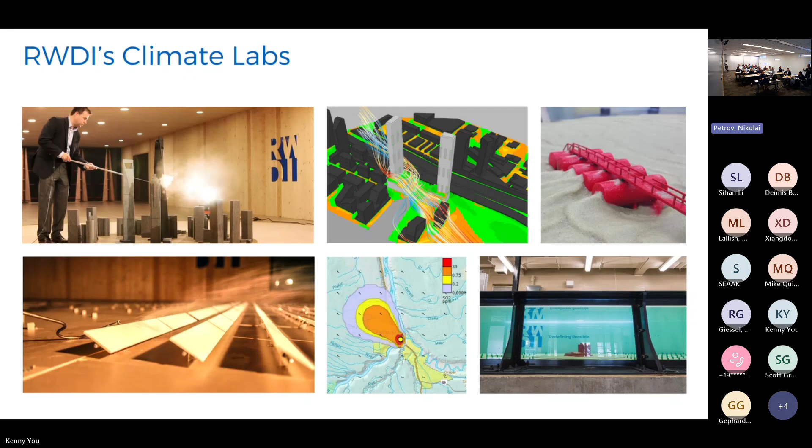Anyway, on the bottom right is our water flume. So just some cool tools. And then this slide, really hard to read for you all. I call this our Wheel of Fortune, but essentially it's all the different service areas that we offer. So we have a lot of wind and snow stuff. We also do a whole host of sustainability type work. So like energy modeling, green certifications, guiding principles type stuff, or even energy modeling and commissioning type work.

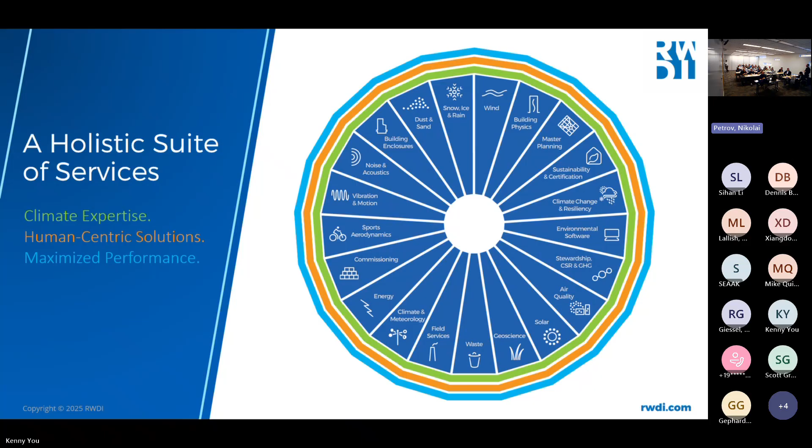We also have a full noise, acoustic, and vibration team. So building acoustics, vibrations from structural vibrations, also acoustic vibrations. And then we have a full enclosure consulting arm as well. So think the exterior of the building, all 6 sides of the box. How do you keep the building warm and dry? So that's what that team specializes in. So a whole host of different types of things, again, on how the natural climate affects our built environment. And I'm going to hand it over to Kenny to get you into the exciting stuff about snow.

Yeah, so today we've prepared 1 to 5 sections to talk about snow and ice. The first probably should be the most interesting to everyone sitting here. It's really how things have changed from ASCE 7-16 to ASCE 7-22, because we've seen some major updates on the snow loading provisions. They're basically trying to make a step forward to make more realistic predictions on both how the ground snow load distributes across the country, and also how the snow loading distribution will realistically form up on the roof pieces, right? And then it also tries to address the uniqueness of your local climate and also your roof thermal performance. I think I'm just going to dive right into this first section here.

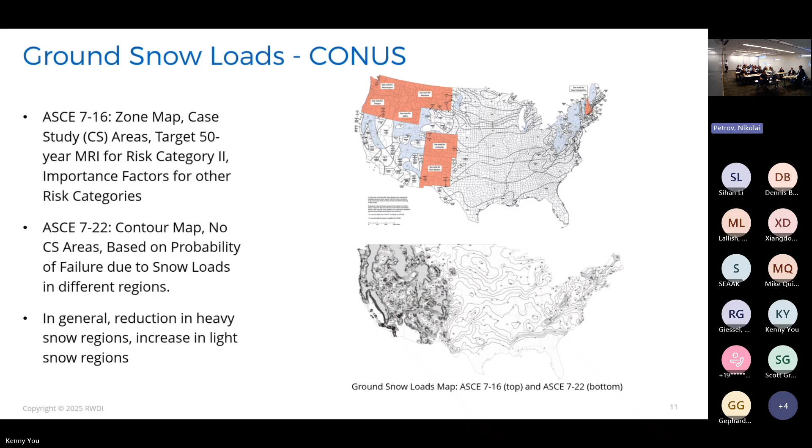So that is the case for the continental US, but not for Alaska. Unfortunately, or fortunately. So far in the 7-22 version of the code, what the code has done for Alaska is really just to bake the 1.6 factor into the values directly. So for example, for Anchorage, you had 50 PSF before for, I guess, a risk category 2. Now you're just having 80. That's a straight up multiplication of 1.6 there.

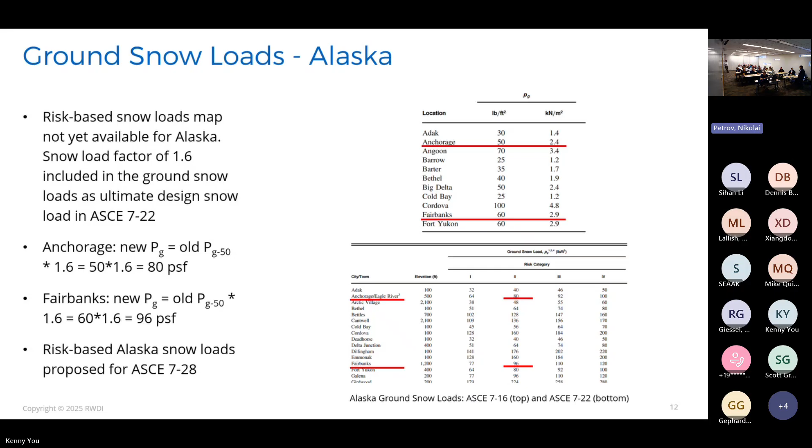But what I heard is that the risk-based approach for Alaska has been proposed, and I think successfully, so it should be coming up in the 28 version of the code. So I guess stay tuned for that.

And the other big thing that was brought into the 22 version of the code is what we call a winter wind effect. Previously we looked at how the ground snow load is distributed across the country, right? Now we are looking at how snow is actually going to accumulate and distribute on the building roof. Previously, if we were calculating the drift surcharge on what we call a step, or a wall between an upper and lower roof, it's purely a function of the fetch length of the upper roof with your PG, which is your ground snow load.

It doesn't really matter how windy it is in a specific city, but you can probably imagine that the windier you get, there's a better chance for wind to push the snow towards that step, essentially forming a larger surcharge, right? So that behavior has been addressed in the newer code, where a winter wind parameter W2 is now introduced, which means in the lower winter wind region, we've got a reduced snowdrift with a lower W2 value, and in the higher wind region, we've got a higher W2. That means the calculation for your drift height will be increased for those areas.

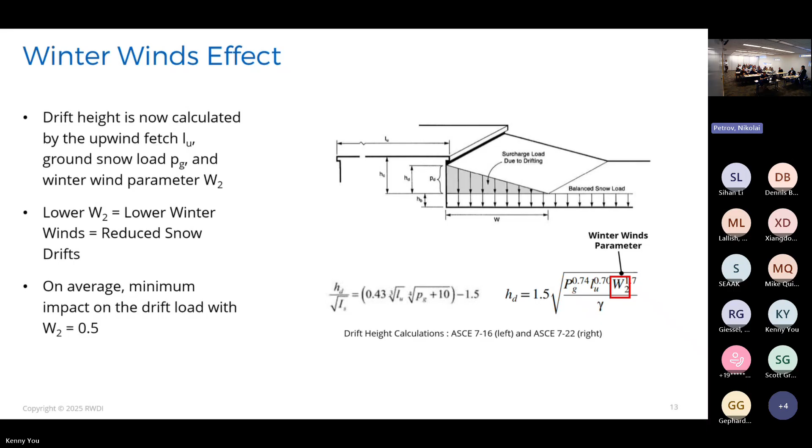And on average, if we're looking at W2 close to 0.5, that means basically very minimal change from the previous code. And if you're looking at Alaska specifically, one thing I noticed: I was looking at this winter wind parameter map for the continental US, and I think the W2 value ranges from something like 0.25 to as big as maybe 0.65. But in Alaska, we actually have a W2 all the way from the lower range of 0.1, which I think was in Fairbanks, all the way up to 0.8 or 0.9.

What that means is that we've got this really drastic difference across the state, where we have cities with really low winter wind speed, so not really able to push the snow on a flat roof towards the step region forming a big drift. But we also have regions where we get, I guess, crazy winter wind, and that's forming really large drifts.

I tried to do a quick calculation for some of the major cities here, and both for Anchorage and Fairbanks, we're looking at relatively low W2 values, where we actually would see a reduction in the drift height calculation. I was a little curious about that before I came here, because those values do mean a really low wind speed, and we were just in Fairbanks for 2 days before this. There's basically no wind at all. And here in Anchorage, I think it's a little windier than Fairbanks, but still, I would say it's relatively calm in terms of how intense the winter wind is. Yep.

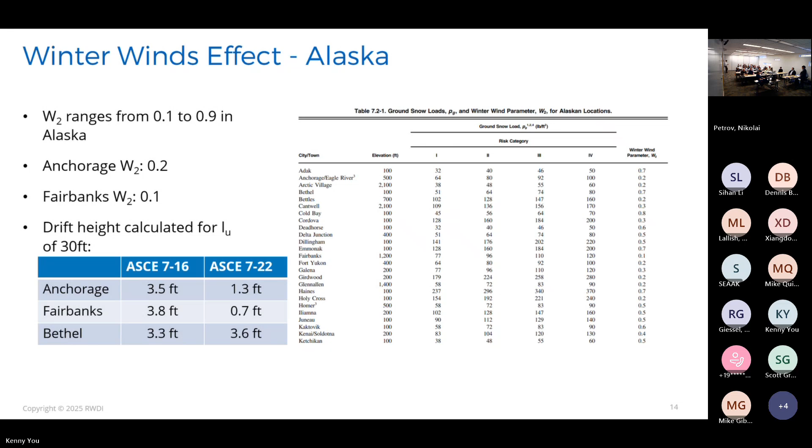I think the next change that was brought into the newer code was this calculation for windward drift. Because previously, if we are looking at a similar size upper and lower roof, we would almost always find the leeward drift would govern, just because your windward drift calculation is 0.75 of the leeward drift, and the geometry ratio stayed the same, 1:4. In the newer version of the code, it addresses that maybe we have to extend the drift length of the windward drift from 1:4 to 1:8.

Which really makes this comparison of the two types of drift trickier. As you can see, I did some quick illustration here. Those are the comparison of the two types of drift from the two versions of the code, assuming we have the same thresholds for the upper and lower, right? And you can actually see that the overall volume of your windward drift increased from almost half of the leeward drift to now equal, if not a little higher than the leeward drift.

But what's important is that the center of gravity of these two triangles sit differently. So it really depends on how sensitive your structure is. And now it's going to be trickier, and you may need to load both of the drifts into a structure model and see which one is the governing case.

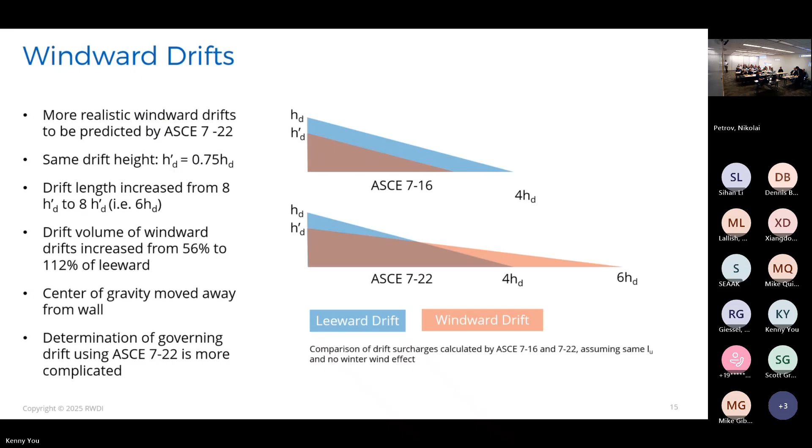The other thing is on the thermal factor part of things. In the 22 version of the code, we now have a more refined CT breakdown for the different roof insulation levels, the R values and the ground snow loads. The roof insulation part is relatively easy to understand. When you have a higher R value, that means you've got less heat emitted from the roof. That means you have less melting, which would translate to an increased roof snow load.

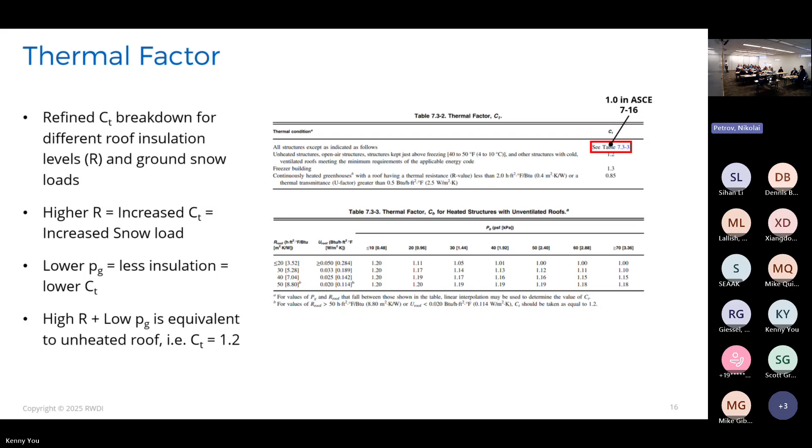But this insulation layer will also be dependent on how much snow you have on top, because the pack of snow itself also works as a layer of insulation. So less snow, a lower PG, means you've got less insulation on top of the roof, and again translates to a lower CT value. And from the chart, if you have a higher R value and a lower PG value, that's almost equivalent to having an unheated roof, which is basically a CT of 1.2.

So far, I think I've covered some of the major revisions in the snow provisions in 7-22. And as I mentioned, the whole purpose of introducing all these updates is really, first, to more accurately predict the ground snow load distribution across the roof, and also to acknowledge some of the uniqueness in local climate and how that would apply to your building geometry, which then leads to the snow distribution on the roof, right?

But again, that's still code, and we know code tends to be a little conservative because it has to cover basically all types of building geometry, trying to envelope the worst case in the provisions. What if we want to see a more refined snow load based on your climate characteristics, or how your building geometry is actually going to behave in the specific climate? To do that, we have a series of approaches, going from a simple desktop analysis to what we call a water flume simulation, all the way up to a wind tunnel testing method.

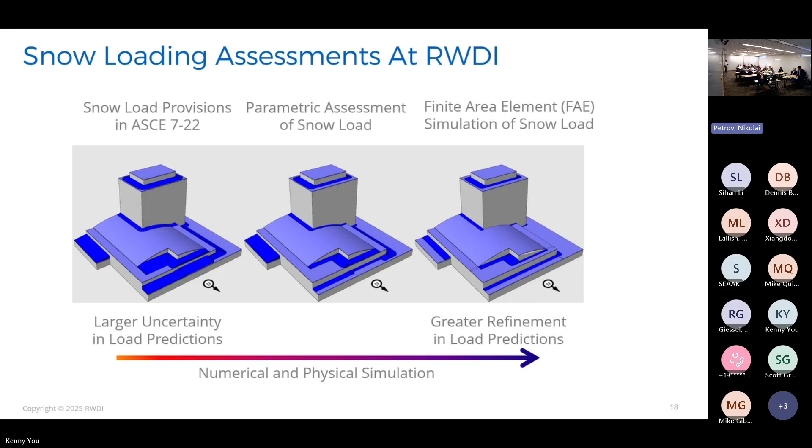The first one is what we call a parametric assessment of wind directionality. Although the code has introduced this winter wind factor, it's basically addressing how windy it is in a specific region. It does not account for where the wind is blowing from. Say, in this case, we've got predominant winter winds from the north and the west. If you have a step facing either of these directions, you will have the code type drift. But what if your step is facing, say, the southwest or the northeast? It won't necessarily form the full drift the code calculates. So we are able to look at the wind directionality and assign reduction factors to it at a desktop level.

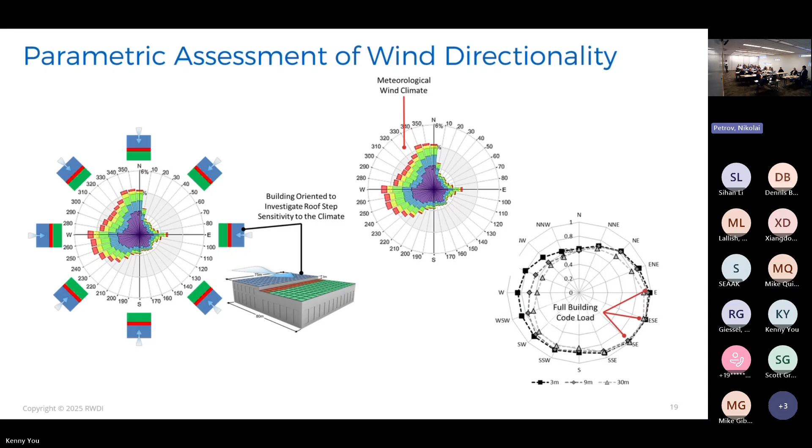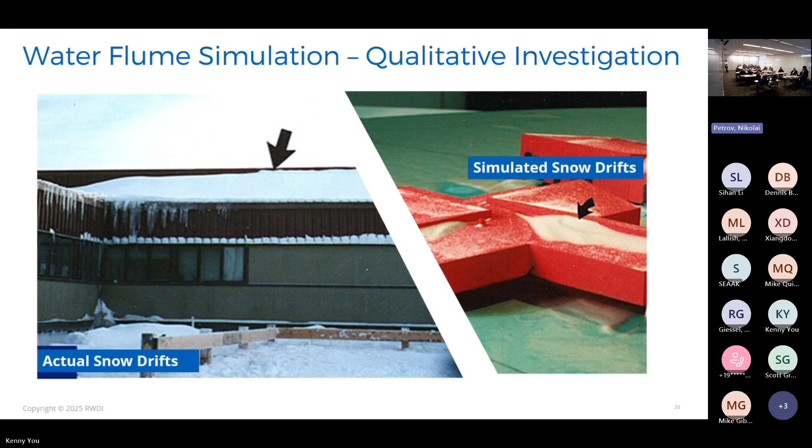And if we need more refinement from that, then we can step to some of the physical model study, including, first of all, the water flume simulation. What the water flume simulation is really good at is identifying some of the more unique snow distribution patterns on complex roof geometries. I think these are probably some of the patterns the code is not able to identify.

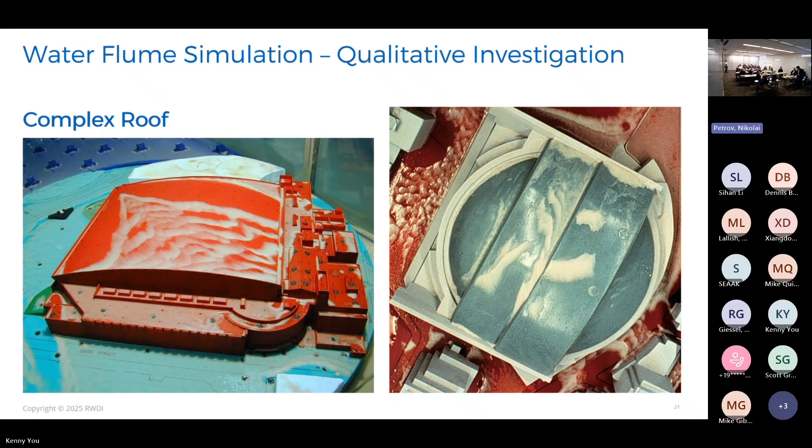After doing that, we can then make a step forward and try to quantify the numbers through a more detailed study. Before I go to that more detailed wind tunnel study, a water flume simulation is also really good at looking at renovation of existing buildings. For example, for this project on the left here, we were actually hired by the owner of the new building, which is in red.

If we're looking at things just by code, where you have a taller building standing next to the gray existing building here, we are going to have a pretty big surcharge on the roof of the existing building. But after we tested the two scenarios in the water flume, we see that it's not really dumping snow directly from the roof of the new building, but it's creating this kind of unique unbalanced loading scenario, where half of the existing roof could be scoured clear of snow, whereas the other half will be basically fully loaded. Those are some of the things we observed from a flume test like this.

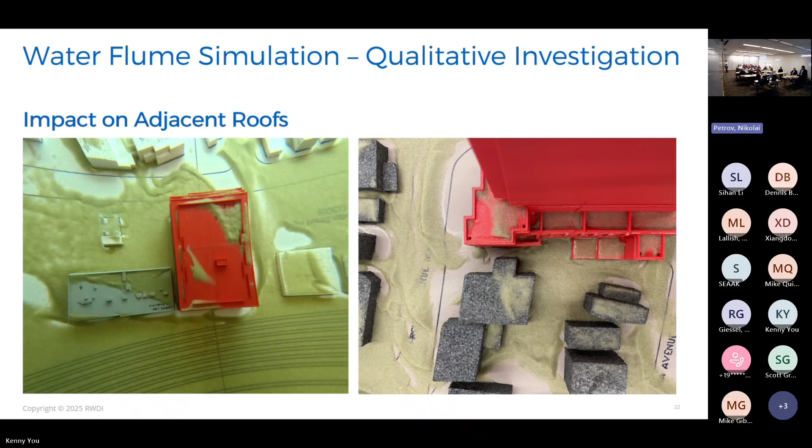We install the sensors across the different areas of the roof. By doing that, for all the different wind directions, we know how wind actually moves across different areas of the roof. Say you would have corner areas with acceleration going on, but then some of the more sheltered areas don't have much wind speed, which means snow is not going to be moved around from that area. So that is the wind tunnel testing part. It's really just to obtain the wind velocity information across the roof area of the building.

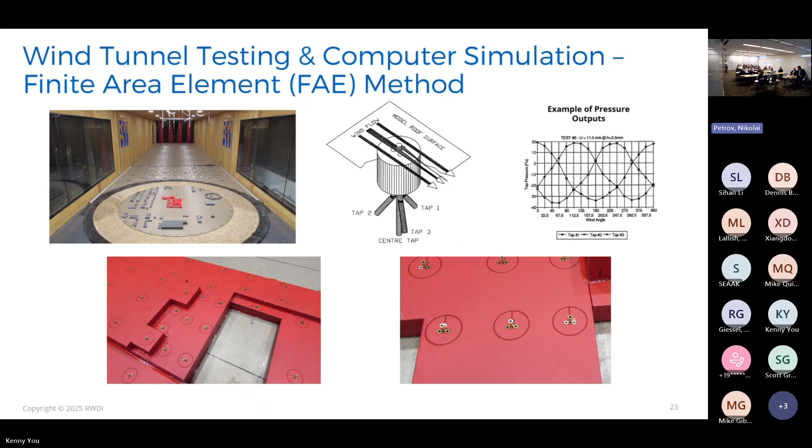It's getting a little blurry now, but we are able to use the wind speed, wind direction, air temperature, solar radiation, cloud cover, and all the good things from the time history to simulate the snow accumulation on the roof, and how snow is going to be drifted given a specific wind direction and intensity in that specific hour. And given the solar radiation, the convective heating from the wind, and the heat emitted from the roof, we're also able to track the melting process of the snow.

If you've got some melting going on in the snowpack, you've got more moisture content. The snowpack tends to be a little heavier and less likely to be moved around, and all those effects are taken care of. What we do is simulate each winter in the time history, maybe 50 or 70 years, work out a peak value for each load case, then do extreme value analysis and fit an accurate statistical model to work out an equivalent 50-year design value to match the code.

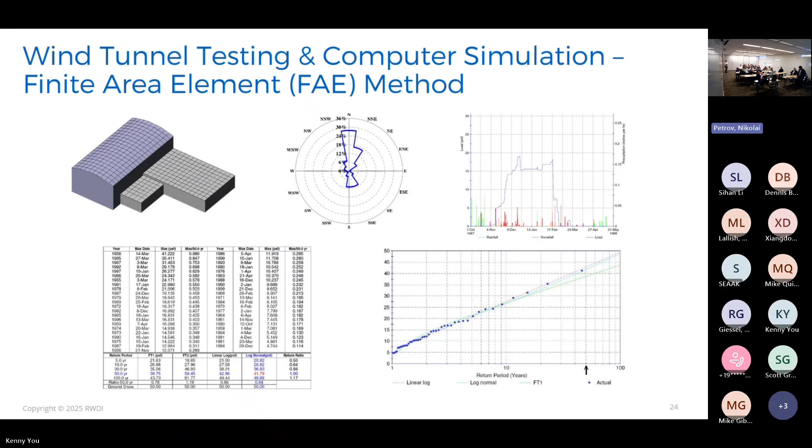So that was just a quick rundown of the methodology of this method, and I think this is one of the examples where the FAE method was really able to take care of the effect of regional climate. The code deals with winter wind intensity, but what we're able to look at is both the directionality as well as things like temperature and how fast the snow can melt.

For this specific project, we are seeing that this classic unbalanced loading scenario forms on one side of the roof, but the same doesn't actually happen on the other side. But if you do it by code, the code says you have to apply this unbalanced loading on either side of the roof, and then try to challenge your structure based on that.

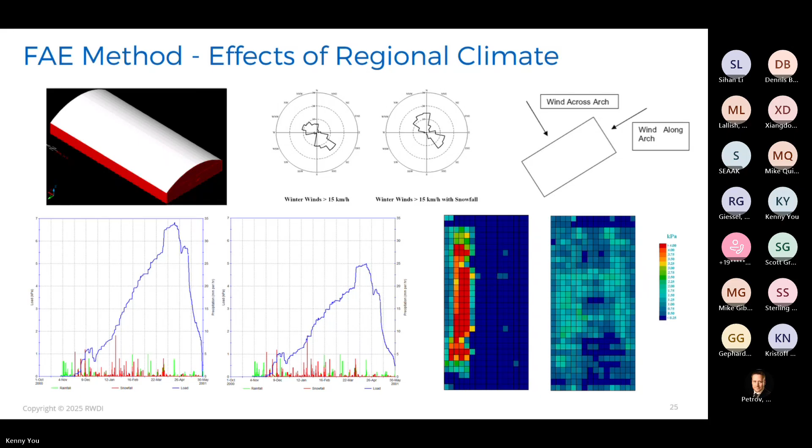You can see that from the comparison of the two time histories here. On the left, we have the ground snow loading time history. On the right, we have the roof snow loading. There's basically a pretty good reduction between the two graphs, and that's really considering how much snow can be scoured off the roof due to wind, and also how much snow can be melted. The other thing I kept mentioning is the thermal effect.

The other advantage of our modeling is we can actually look at how snow is melted, both from the heat emitted from the building itself and also convective heating brought by the wind. This is a recent project we did where the client was trying to do some renovation work on their existing R12 roof. They were trying to see if it's okay to upgrade to an R40 roof without having to do a bunch of renovation to reinforce the structure. Using the code, going from R12 to R40, we're looking at something like a 20% jump in terms of the snow loading.

But if we take into account all the wind scouring and also the convective melting introduced by wind, the difference we're seeing from R12 to R40 is definitely lower than what the code suggested. They were quite happy about the values we provided, and they eventually went with the R40 roof.

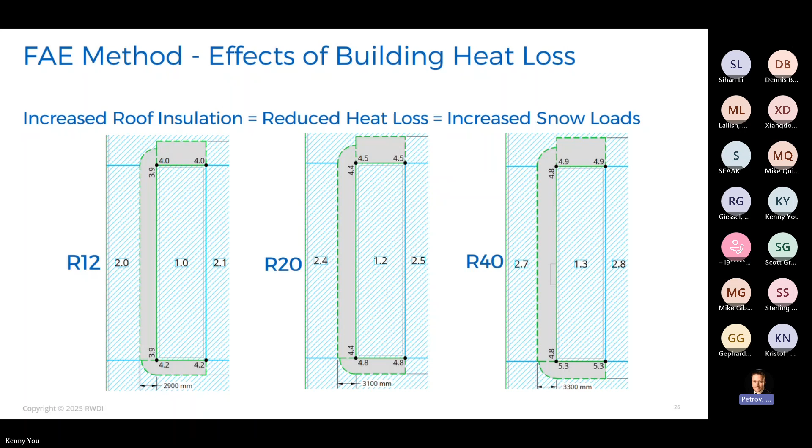And on the other side of things... a lot of these tools are not newly developed. We've been using them in Canada for probably 20 years. Some of them were developed around the Skydome project, the Blue Jays Stadium, because the owners wanted to get a better understanding of how the structure is being loaded.

Things like load duration are considered in some of those by using the time histories of precipitation through the winter and the number of freeze and thaw cycles, getting a much more accurate picture of what's happening in any given winter. Then we cycle through a record of maybe 50 winters, and based on the extreme load buildups, we can calculate loads fairly precisely. So they're not new tools, but it's fairly recent that we've been able to leverage some of these tools within the American standard, the ASCE.

We've got a question there? Yes, this is a question you might not want to answer, maybe can't answer, but how much does this cost to do? I've got experience working with you guys on a project, and whatever it was that you charged the owner was worth it because you showed that the code snow drift on an existing roof where we're putting an addition, your study showed that the drift was much smaller, so it prevented having to do very costly roof upgrades. But when we're trying to weigh options in the project, it might be difficult for us to know when we hit that critical mass of, hey, we should call RWDI and have them do a study here. I don't know if you've got any ballpark guidance. Are we able to just call you on a research basis?

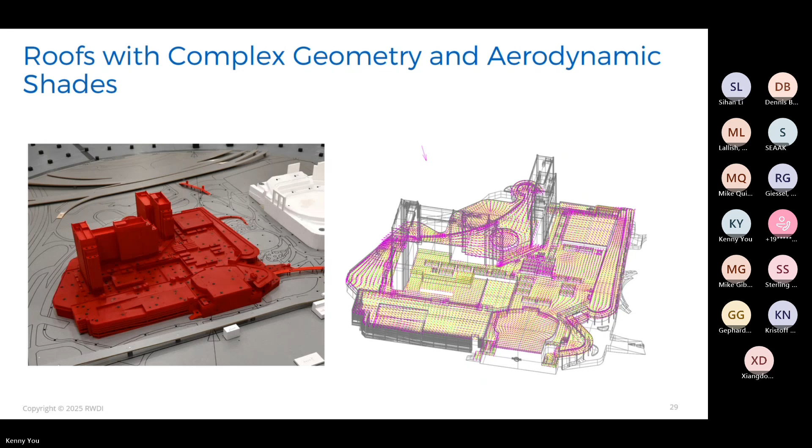I think this is addressed in the Canadian building code now, but not yet into the ASCE. When you have a roof that's large enough, the wind is not necessarily able to scour the snow off the roof. It's really just pushing snow on one side of the roof, moving to another portion without reaching the edge of the other side. That characteristic of a larger roof with larger flat areas can be well captured by the FAE method.

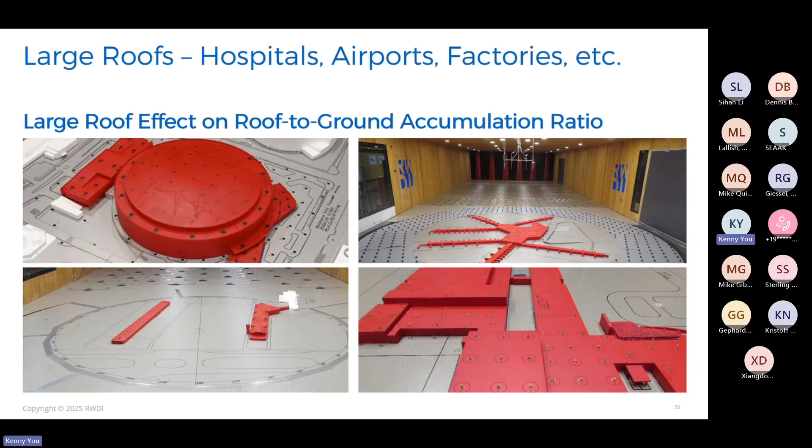For this stadium itself, we're also able to reduce the unbalanced loading that code would otherwise suggest. This is a classic sort of refinement on the unbalanced loading scenario. This is Logan Airport in Boston, and they're trying to add an arched canopy between the terminal and the parking structure. By code, you would almost have to do a classic unbalanced scenario, basically taking the load away on either side of the roof and applying it to the other side.

But as you can see from this building geometry, if wind is coming from the bottom of the page, it's possible to push the snow on this side of the arch to the leeward side. But if we have wind from the top of the page, just because we've got a much taller massing of the parking structure, we shouldn't be seeing much wind movement on the canopy itself. And that's exactly what we found by running our analysis.

So this is the unbalanced scenario we are able to capture from the FAE: half of the arch is pretty much cleared of snow, and it's redeposited back to the leeward part of it. But we are not looking at a scenario where this part of the roof is loaded and the other half is unloaded.

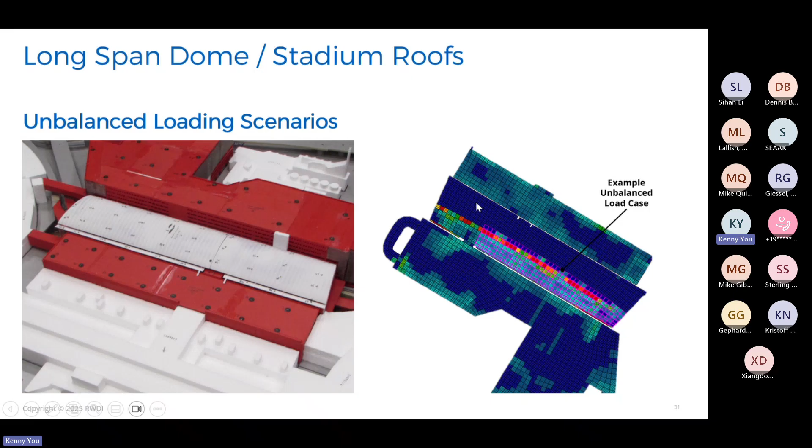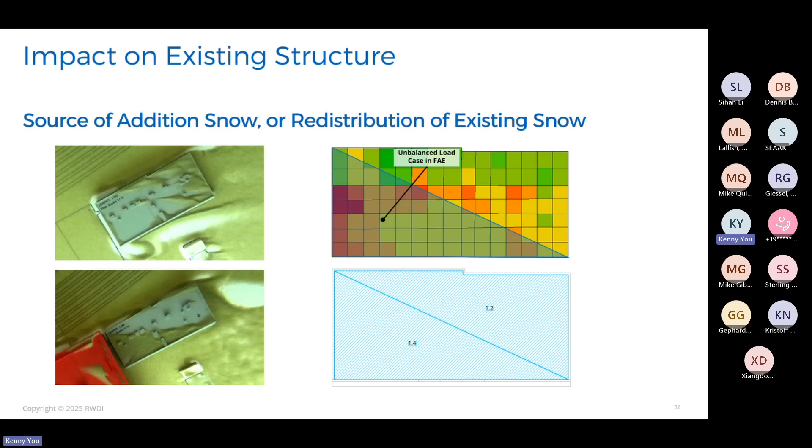One of the gentlemen suggested, what if we take the entire winter into account, because that's going to move snow around differently. That's something FAE is able to do. After we do that, we did find there is an unbalanced loading between the two triangle areas, but the difference is really just 0.2 kPa, which is around 4 PSF. So the client didn't end up having to do a reinforcement for part of the existing structure.

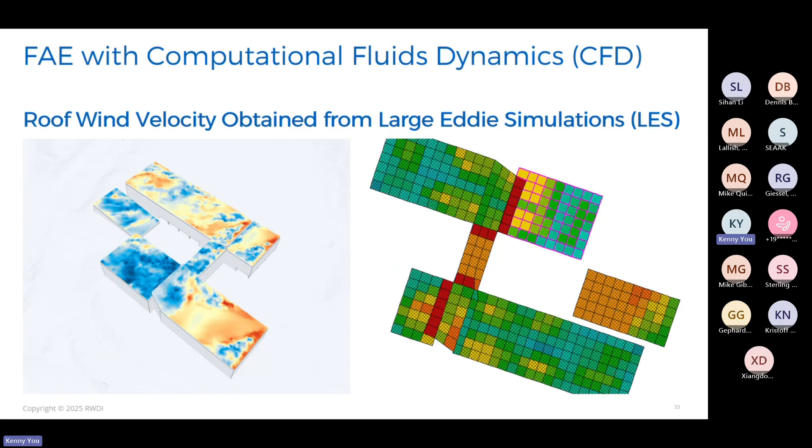As a side note, we're also able to utilize some of the more advanced computational fluid dynamics tools we used for the wind engineering side of things and apply it to the snow movement on top of the building. So I think that pretty much sums up the approach we take for building roof snow loading. I'm going to be heading to the other snow issues like snow drifting and falling ice and snow.

Before I do that, do we have any questions? Okay, we still have time. Keep going. Sounds good. Quick question.

Sorry, can you repeat the question? I can only hear part of it.

Oh, now I'm concerned we lost sound again. Do you want to continue? Yeah, we'll see if we can get Mike back on to talk about that. No, that's your question.

Good, sorry, I'm here. So what I've talked about so far was really just on snow loading on the building roof and utilizing some of the tools we have at RWDI. We can also look at how snow is essentially drifted around the building at grade level from more of an operational and maintenance point of view.

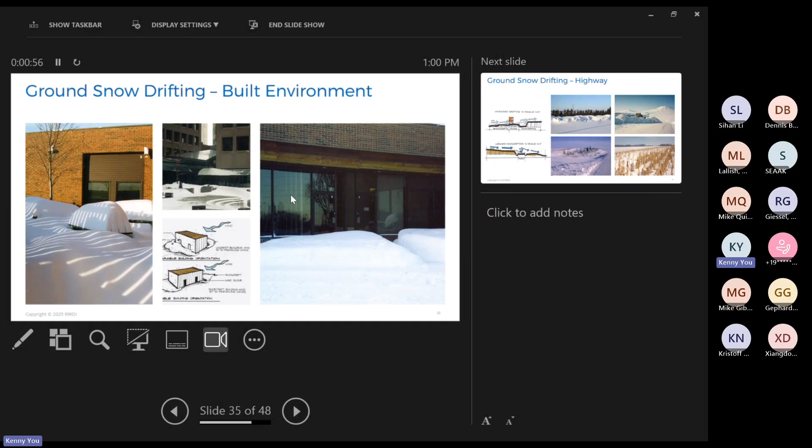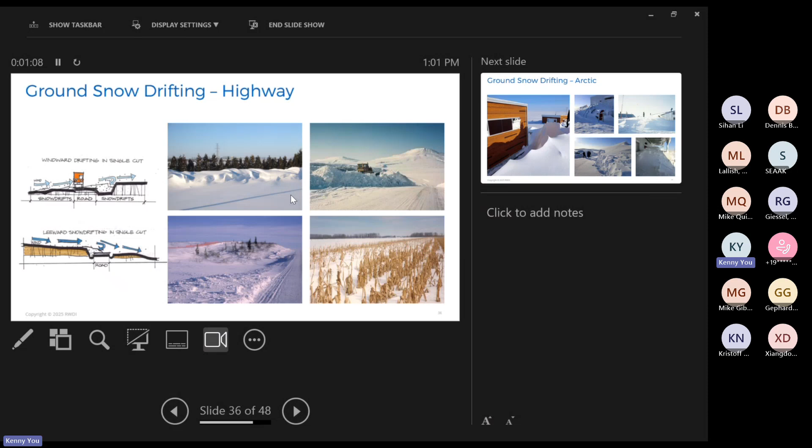So those are some examples in a more urban or suburban built environment. We also work on highway studies. Basically, if you don't start considering this aspect of snow drifting, you would end up having snow drift onto different parts of the highway. And then we were also involved in some Arctic works, including some research stations in Antarctica as well.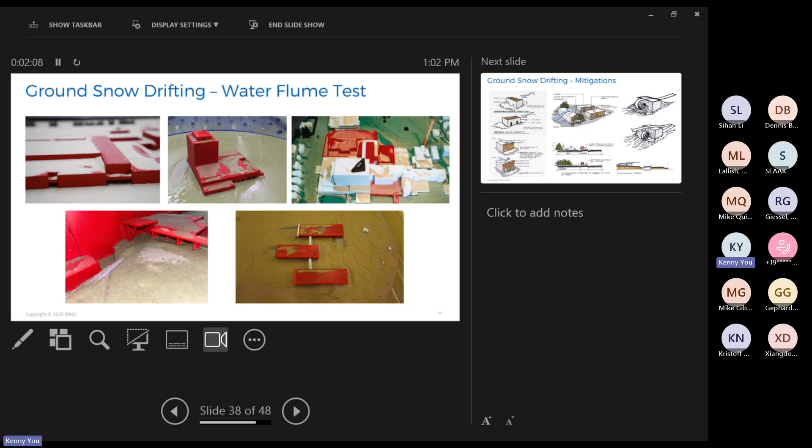On the bottom right here, we're looking at a research station where we're asked to basically do a workshop of how far the building has to be lifted from ground to avoid substantial drift at your entrance or staircases. They're also looking at how far these buildings have to be spaced out, so each building isn't interfering with each other in terms of creating snow drift in front of the neighboring building.

Here are some concepts we can think about to mitigate some of the ground level drifting issues. As I said, we always prefer early in the design stage, then we can really just play with the location of your building as well as the orientation of them.

But if we are at a later stage of design, we can still add features like a parapet or canopy, or even some niche stuff like a wind deflector, to really push snow away from the entrance.

In terms of highway, it depends on the wind directionality and wind exposure. It will be necessary to either plant trees or dense forest, or an artificial snow fence on the upstream side of the highway, just so that the snow drift potential can be captured before it reaches the highway.

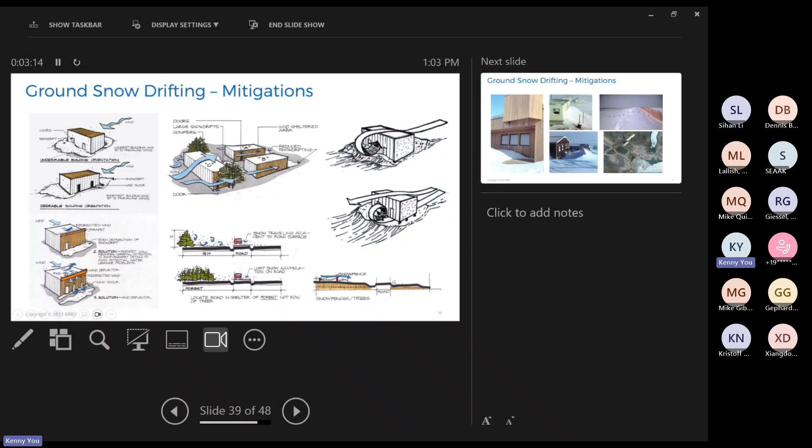Here are some real world photos of some of the mitigations I talked about. On the left, we have this classic wind deflector that's pushing snow away from the entrance down there. In the center, we've got your raised building, essentially creating this channeling effect between the building and the ground, pushing snow away from the building facade. I think this would also help with snow entrainment into the building.

On the right here, you're looking at a classic snow fence - what it does is it tries to trap the snow particles right behind this fence, so it doesn't move forward and enter. In this case, these two snow fences are installed further upstream of this village, I think in the Hudson Bay area in Canada.

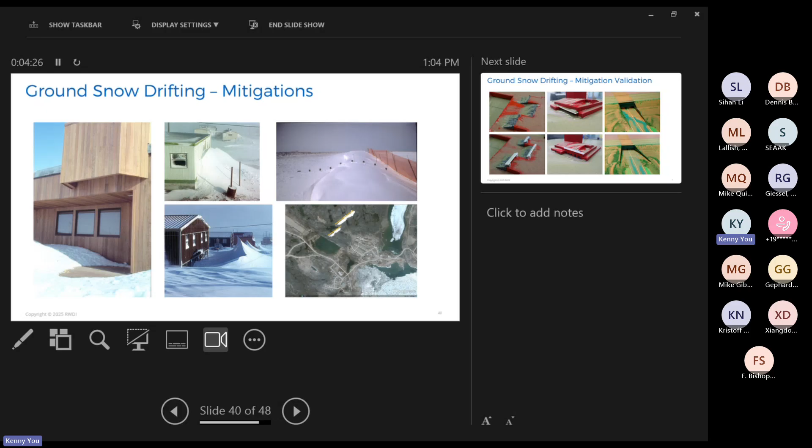It was designed like this, so the bulk of the volume of the drifting snow can be captured before it reaches the village, so they don't have to deal with the same amount of maintenance work during a typical winter season.

Here's another look at how we can utilize the wind tunnel simulation to validate some of the mitigation strategies, in terms of say adding a wind deflector, or where it can be as big as changing our highway design, so we can try to minimize the scale of drifting predicted on the highway.

And I think that pretty much sums up what we can do from a ground snow drifting perspective.

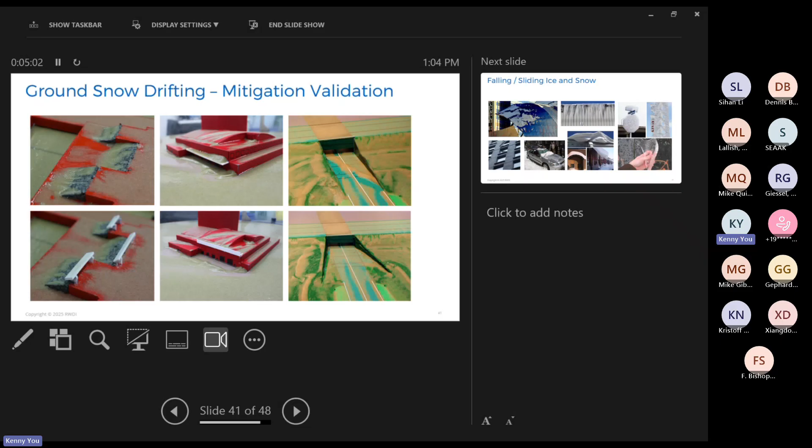What we're also sometimes involved with is falling or sliding snow and ice. It can be from things as big as a curvy, slippery roof, to smaller instances from pretty generic window sills and overhead soffits like this.

As I said, we always prefer to get involved early in the design stage, so that we can really just look at the overall design package, because there are little things we can point out for the architect or engineers to consider and add to the design, to try to minimize some of the risks.

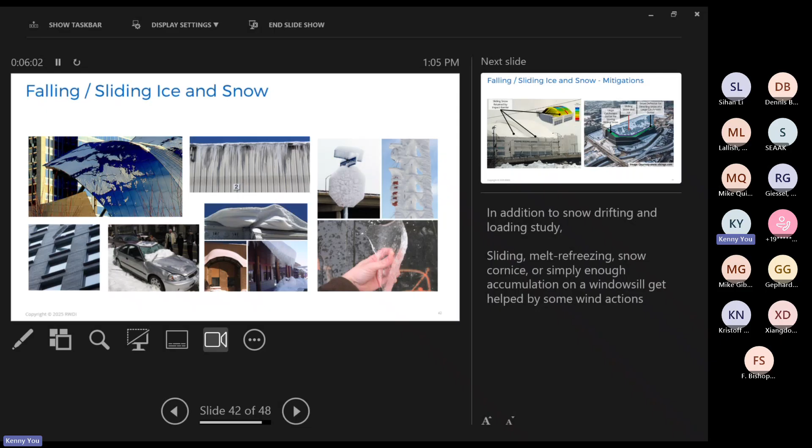But if it's later in the design stage, even after construction, some of the mitigation features will be much harder to apply. The next slide shows two of the bigger projects we worked on, trying to help identify some of the sliding scenarios, basically how much volume of snow can slide off the roof. On the left, we have the SkyDome, Rogers Centre in Toronto, Canada. And on the right, we have the Vikings Stadium.

So for the Vikings Stadium, we helped them first of all determine how much snow there will be on the roof from a structural loading standpoint, and that information also helped them design the catchment area so there's sufficient capacity for the snow to go in. And I think John mentioned that there were some substantial structural steel savings on this one.

So the snow studies, by reducing the unbalanced loading on the roof, the balanced loads and the drifts, saved about $8 million, so you can lighten the roof structure and reduce the cost significantly. So the detailed studies had a big benefit. You've got those sloped surfaces, and the snow is going to come off of them at some point. You can try to retain it. That's one strategy, but a different strategy is to allow it to slide off the roof, but you've got to allow for a catchment area to prevent any issues with falling ice and snow or risks to people using the building or operations.

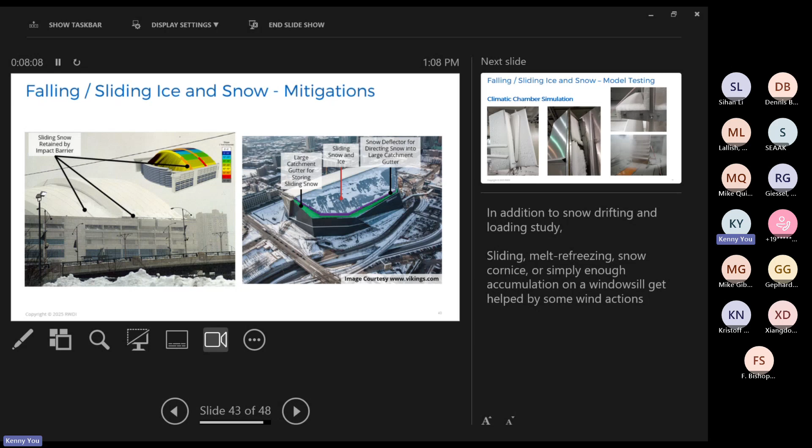Then the next slide is how we can actually get these more unique architectural features tested in a realistic way. We can send them into a climatic chamber and simulate the same sort of winter conditions for that specific region. We first apply some precipitation, snow, frozen to the features, and then we start increasing the temperature, so it starts melting from the bottom of the snowpack.

When you have a thin layer of water between your facade and your snowpack, that's when the snowpack is going to start sliding. And then we can work out the ideal slope to either retain the snow as much as possible, or make it steep enough that it slides as soon as it falls.

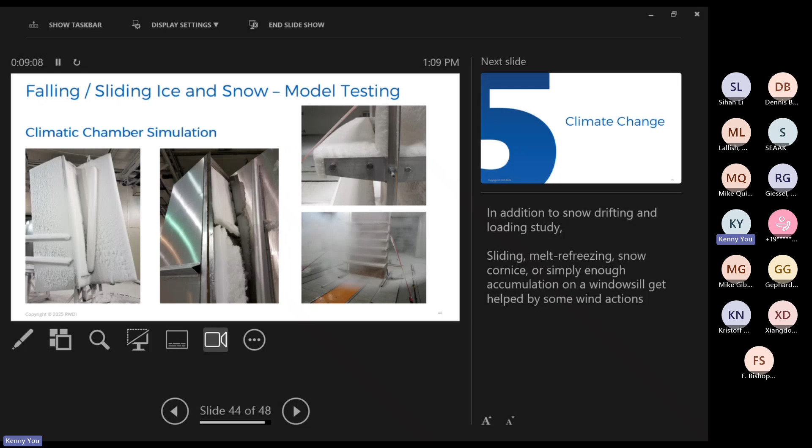Kenny, you got a question in the chat? Yep. I think we're running out of time here. We're going to need to. Yep. So I think there's one more slide. I think the last slide is probably something you'd also be interested in.

Some of the folks both in ASCE and at our company have been working on the climate change aspect of this, both wind loading and snow loading. This is a paper published by one of our colleagues at RWDI. From his study, at least based on the more conservative climate change model, we are looking at an increase of both snow load and wind load in Alaska, especially in the northeastern part of Alaska. The magnitude of increase, at least for ground snow load, is roughly 10%.

Obviously, there's going to be more study to be done. But I think in the 2028 version of the code, there will be a climate change chapter, and potentially some of those values will be presented there as well. So I think that's pretty much the end of our presentation.

I did ask your question to our partner in Guelph, and he just wasn't able to unmute himself. But he said that for the ground snow map for Alaska, there's an effort to update the values to be similar to the contiguous United States for the 2028 version, but it's nowhere near 100% sure that's going to make it in that version. And he said there's an optional future conditions chapter addressing climate change. There are proposals in there for wind, snow, rainfall, and ice accretion change factors for the future as well.

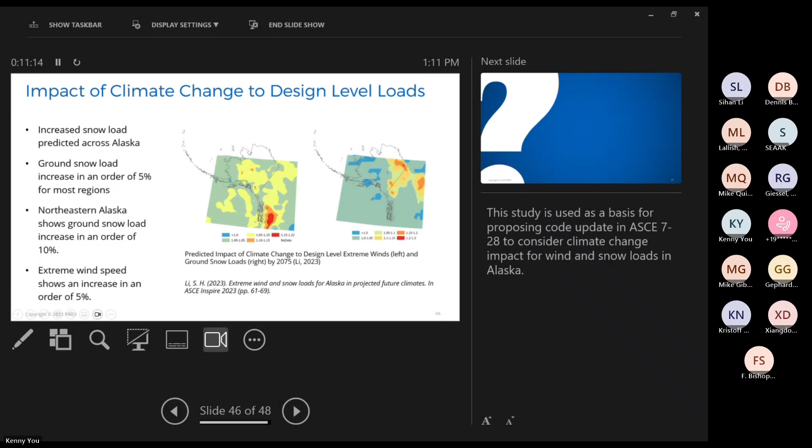Mike, is that you? What's that? Mike Gibbons. Can you hear me now? Right. Yeah. Awesome. Thanks, everybody. That's probably the end of the questions. Thanks for coming up and doing your presentation. That's for you. Thank you. Everybody likes more water bottles. Yeah. Fill it with ice and take it through TSA. All right, thank you.